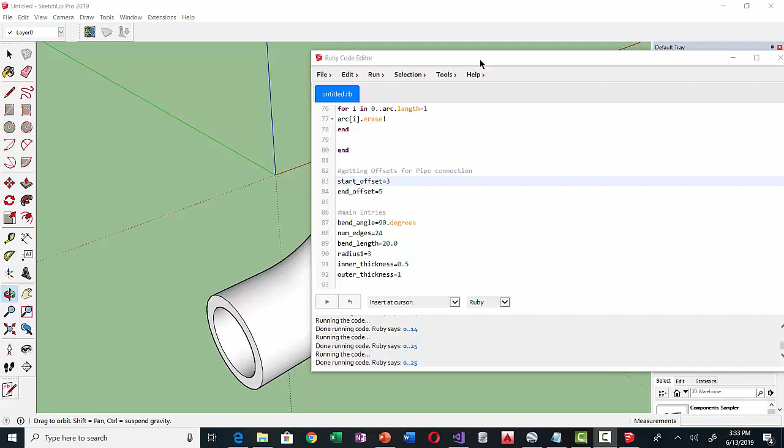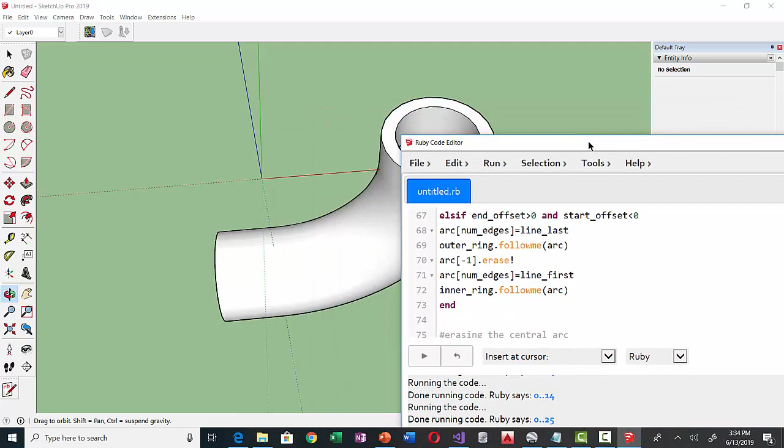Hello Sketchup community, today I am going to show you how to draw a bend that is likely to be more practically used in our daily lives. For example, it has got some space for the pipes to join, and it also has got the outlet opening to join the pipe. In this video I am not going in detail about the coding, but I am just using two methods that I have already coded.

That is, the first one is getting offsets and the second one is drawing the bend. So first I will show you an example and then we will discuss how it works. Let's go down to the location where the program starts.

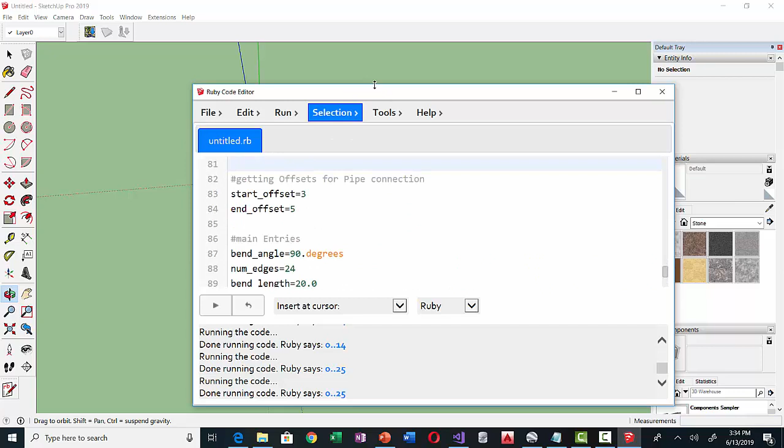First let's go to the input parameters that we are going to provide to do the work. The start offset is the distance or the length for pipe joint. For example, here from the distance between here to here is the start offset, and if it is -3, then the inner part will come outside and the outer part will go downside.

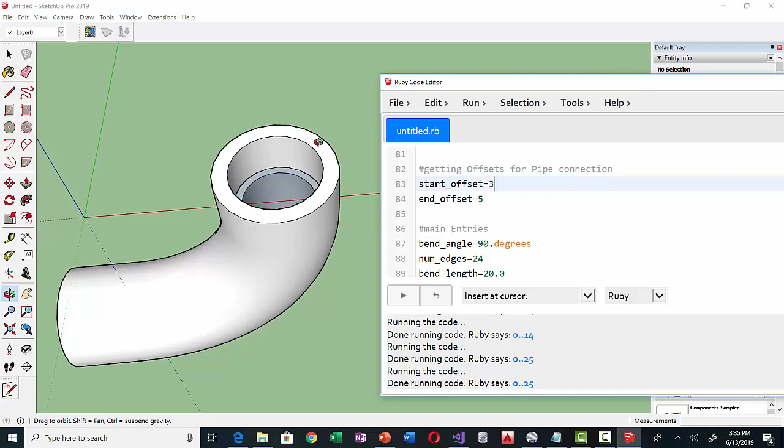So similar in the case of end offset, the end offset is 5, that means the distance between here to here is 5. So if end offset is negative, the inner part will come outwards and the outer part will remain inside.

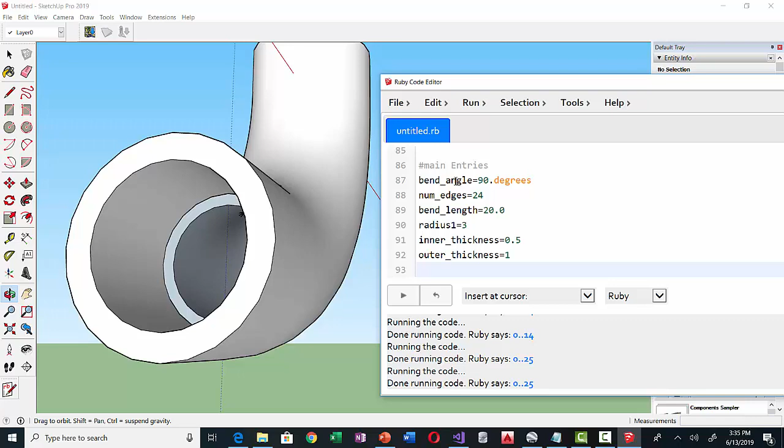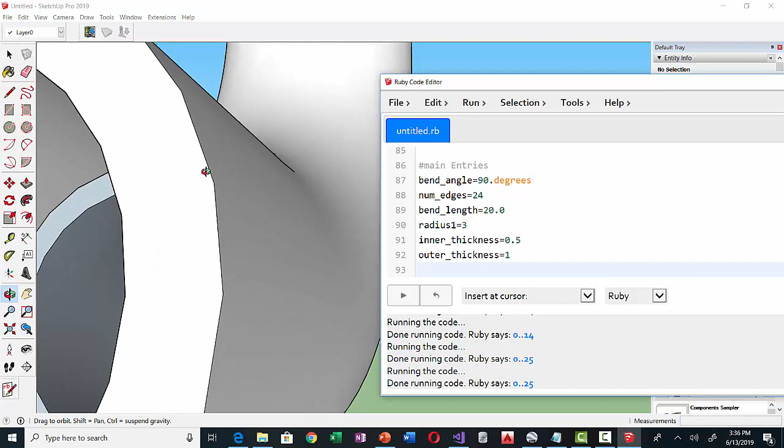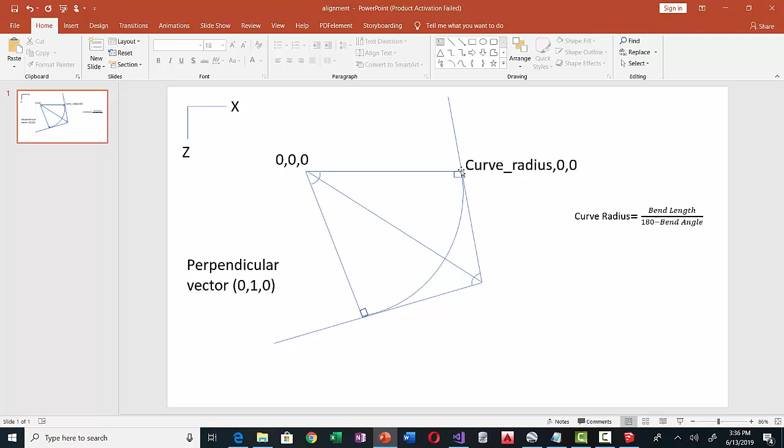Then comes bend length. You can see here the curve starts from here to here, so this is the bend length, and this bend length is excluding the offset outwards, or this bend length does not include this offset that we have provided here.

Then the inner thickness is 0.5, so this distance is 0.5, the outer thickness is 1, and the radius is 3, that means this radius is 3. So with respect to this middle radius, the outer thickness and inner thickness are taken.

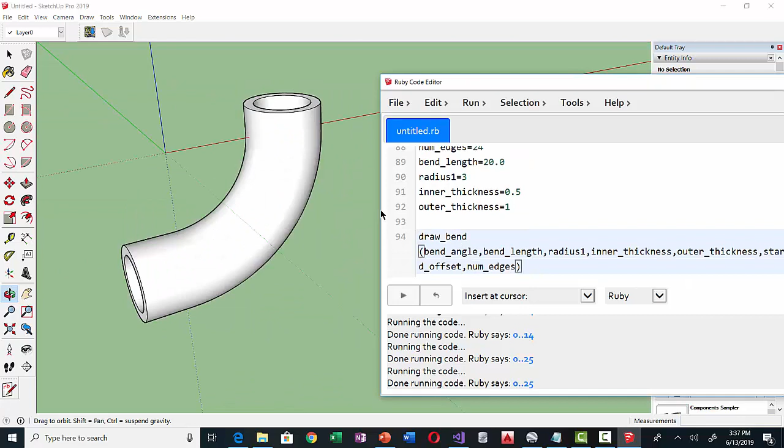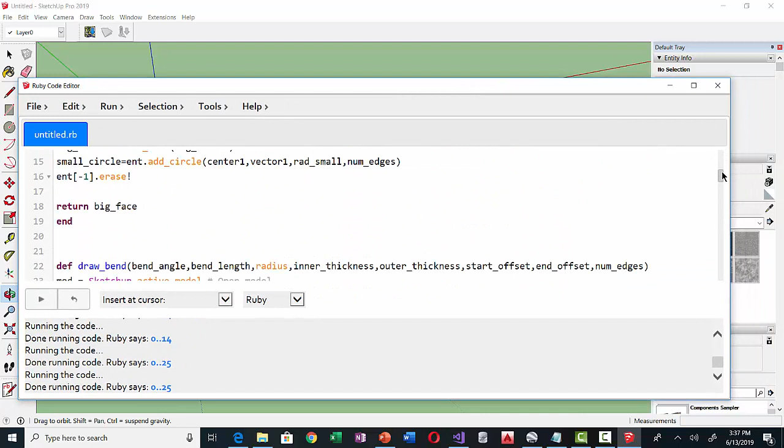Then what we have done here is we have just used this method, that is draw bend, that I have already written above. You can see here, this is the method. I have already defined this method of draw bend. It takes these input parameters and finally gives the bend to us.

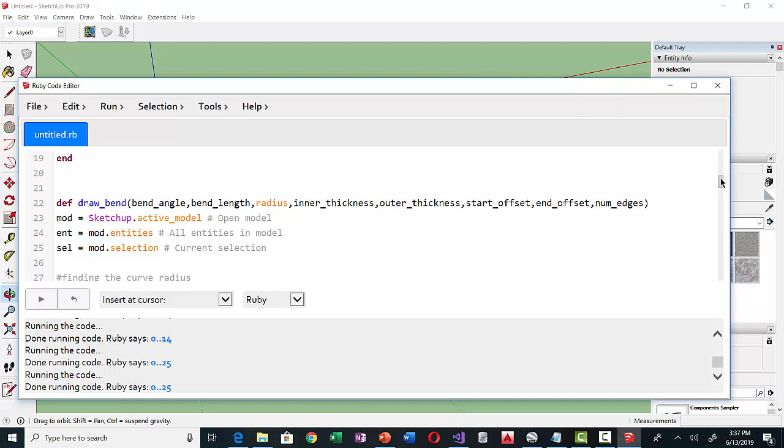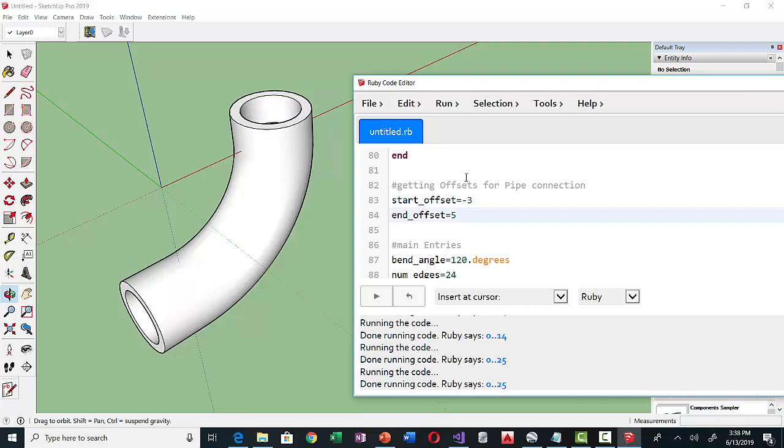Now let's take different types of examples here. Let's change the bend angle to be 120 degrees. Let's change the bend length as 100, and let's give the start offset as -3, and let's keep the end offset as it is. Let's go to the model, press Ctrl A and delete. Let's come back to this Ruby code editor and press Ctrl R to run the program.

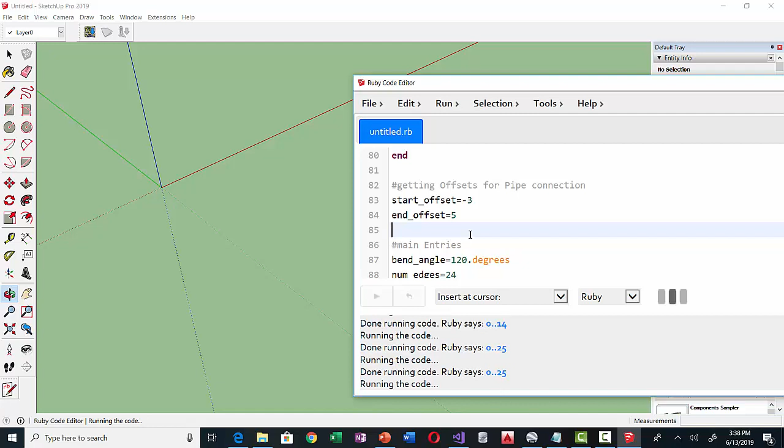As you can see, we have increased the bend length, so the length has increased.

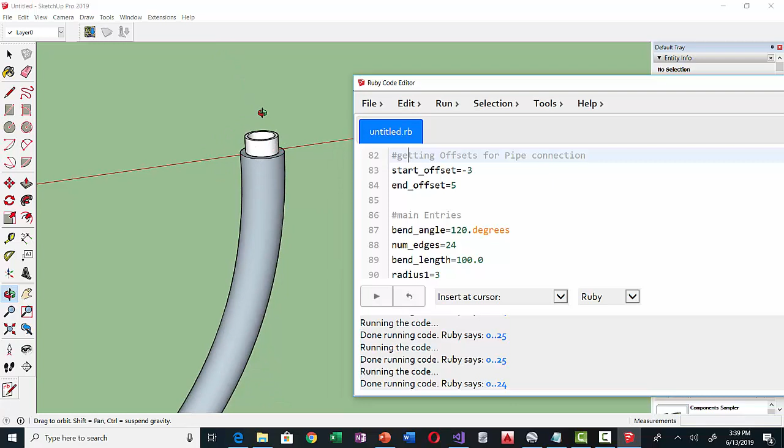Now you can see here that we have assigned the start offset to be -3. That means the inner side is protruded outwards and the outer side remains as it is. So it is useful when you need to join the pipe such that the pipe remains outside.

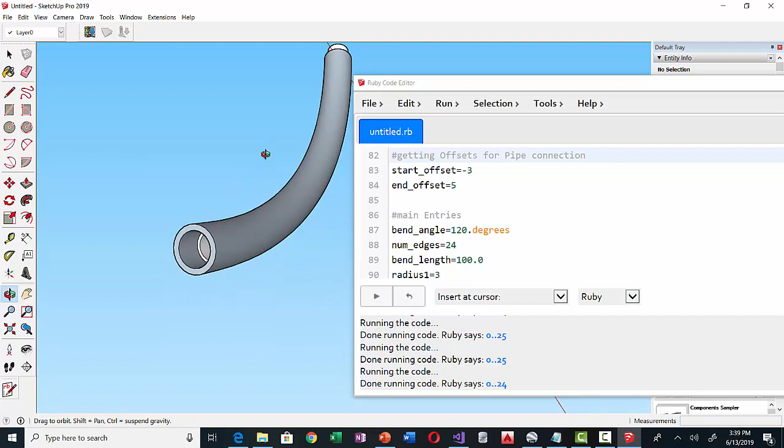And in the outlet section we have given end offset as 5, so it is positive, hence the inner part remains in the inner section. So you can also interpret this as a male and the female version of the bend.

Now let's change the radius only. Let's say radius is 1, and let's press Ctrl R to run the program. Now you can see that it has the ability to draw in the same model. That means we have repeated the step and we got these two results like this.

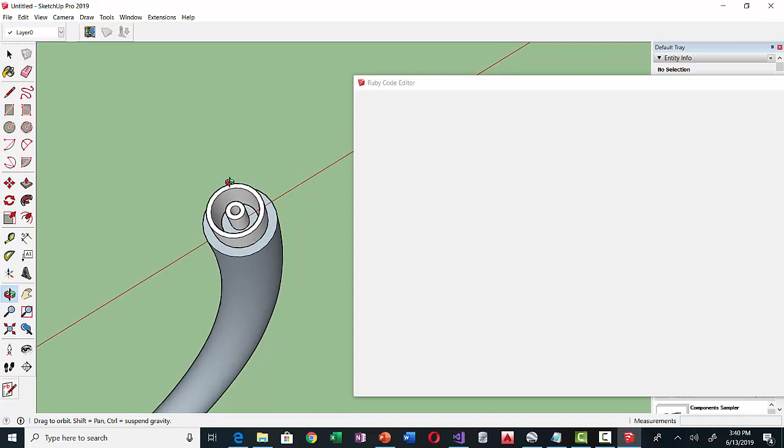So if you have different cables inside, you can also model cables through this method. For example, like coaxial cables and fiber cables can be constructed by using this method also.

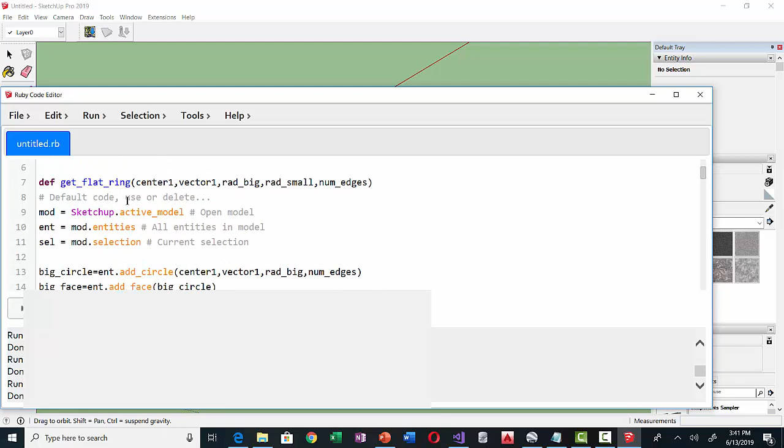So let me give you a basic explanation of how the code works. Get flat ring, it takes the center, vector, big radius, small radius, and number of edges to get flat ring. For example, let's draw a circle like this, and let's draw again another circle. Then it will select the inner face, deletes it, and gets this flat ring.

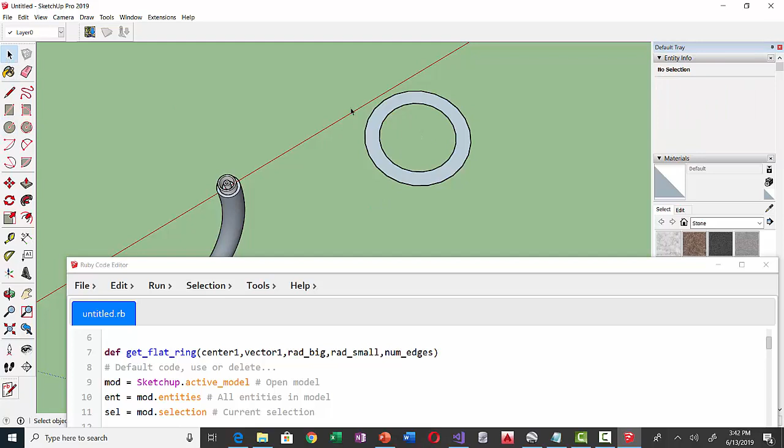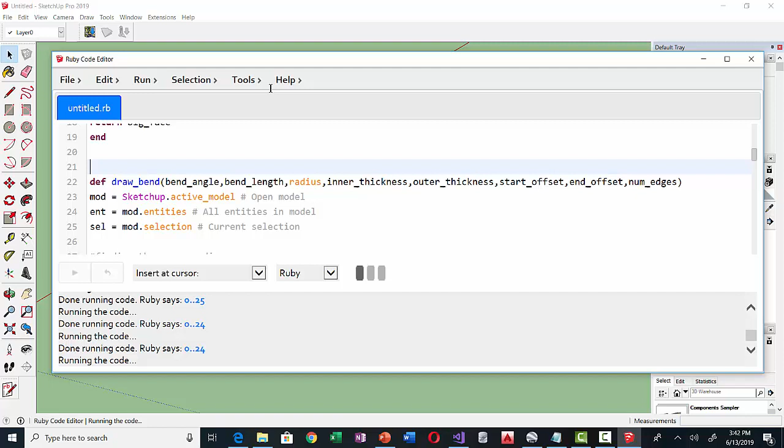Then another method is directly it's draw bend. Let's again run this program by pressing Ctrl R and see how does it work. So first it draws an arc like this.

First it draws the flat ring as we have discussed earlier. Then it will use the follow me command to follow this ring towards this arc, and same is the process with the outer flat ring. It will also follow the same path from here to here and get the result.